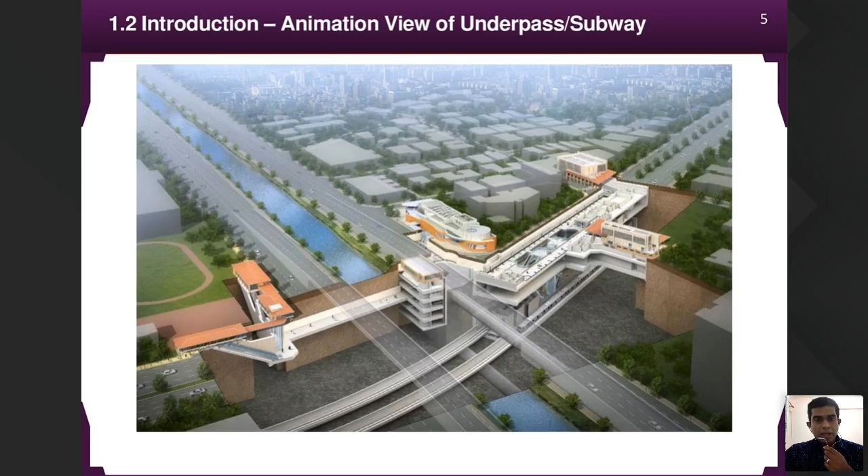So we will just see a scenario. In this picture, we can see two highways. Here is a highway and here is another highway. Also here we can see there is another highway cutting through this, and there is a water channel also there. So a government is constructing, just an example, a government is constructing an underground metro train.

So we can see this is one track and this is another track. After people coming out from the train station, they will go to this level called concourse level. Once they enter into the concourse level, if they want to cross to this side of the road, they need to come out and then cross this traffic light and then go over this bridge and then cross over this traffic light across the road.

So this will create a lot of congestion to the traffic because it needs to keep on going red and green, so there will be a lot of traffic jam if this is really a busy, very busy highway.

So for that, usually what we will do is we will build a subway. We can see this is a subway. Just now we discussed this one is a railway track one way, this is another way, and this is a subway. This subway is below the channel, the water canal, below this. So people need to cross over here, then come out, and then go to this side of the road. So this is just a typical example.

Now we go to the real side situation. Just an example, just now we saw in the previous slide, this is a one-way train track and this is another way train track. When people come out from this station, they need to go over here underground and then cross over here.

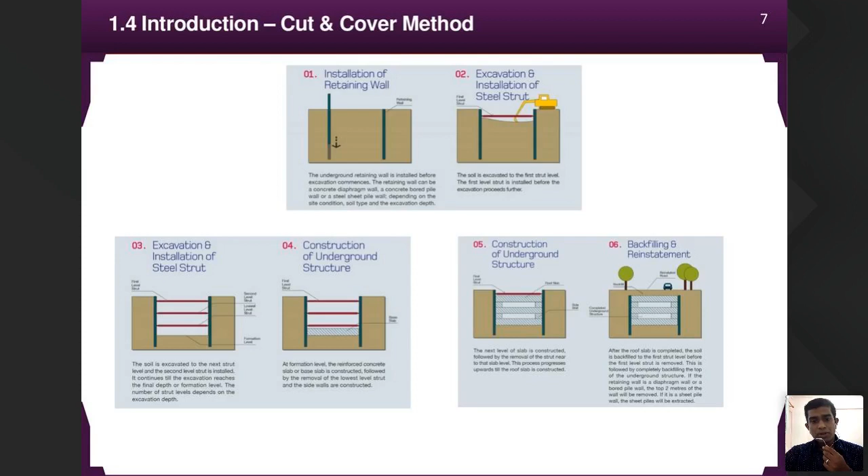So to avoid all this, we will be using this method. So for diaphragm wall construction, we will use the D-wall machines, and then after that we will pour the concrete. Then this is the starting. So this is actually a traditional way of constructing a subway or underpass.

Now we will come back to what are the utilities. So these are the utilities, and we need to divert them before we start building our retaining wall structure. Then there's the natural calamity impact.

During the construction time, there will be flooding, in case of Chennai there will be flooding, and in other places too. Then working in the hot sun and getting hit by vehicles, there will be vehicle accidents. There will be a lot of insurance issues if anything happens, and ground settlement, impact on groundwater level, and installation of recharge wells.

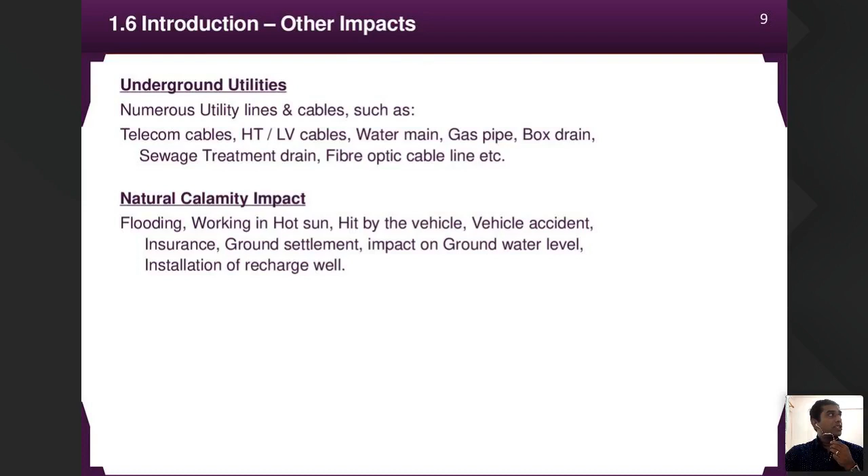So now we go to the tunnel boring machine. Just now we saw about the cut and cover method. So how will the tunnel boring machine help in this? Let's see a similar scenario.

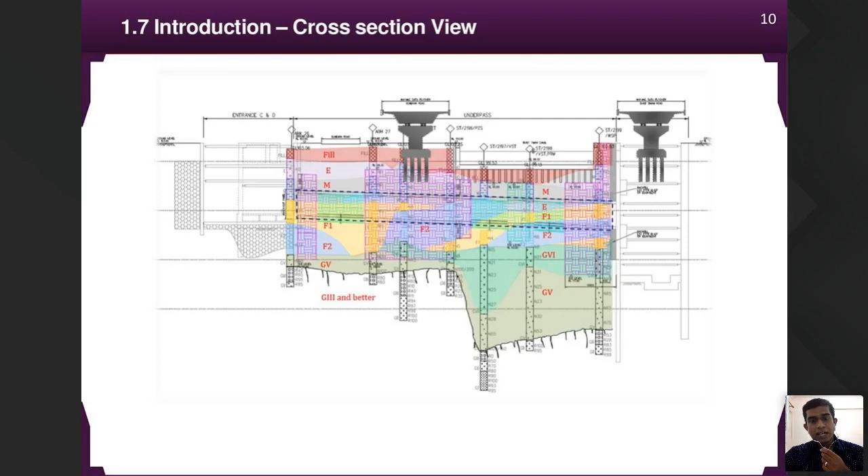So this is why we can propose the rectangular tunnel boring machine in place of the cut and cover method. So we will see the introduction and benefits of RTBM. Why do we use the rectangular tunnel boring machine, and what is the benefit? Compared to the conventional cut and cover method used in construction projects, the trenchless method with the RTBM brings about an estimated 40% increase in productivity, reduction in manpower, seamless and better continuity of work, and higher quality and workmanship.

We just now have seen the animation and also a real site condition. This we have done in Singapore. This particular area, the government planned to construct a subway, which we have already finished. They planned to construct a subway, but they needed to overcome all these difficulties: road, viaduct, overbridge, and a river.

So the government of Singapore contacted the government of China, and they came out with a proposal of using this RTBM. Usually the cut and cover method for this particular area takes an estimated 2 to 3 years, but we completed the same subway in the same location in 1 year, because 3 months is the construction using RTBM, but the preparation takes around 6 months. So 6 months plus 3 months for RTBM operation, then handover and reinstatement back to working condition, it all takes around 1 year. So when we compare to 2 to 3 years, we completed it in 1 year.

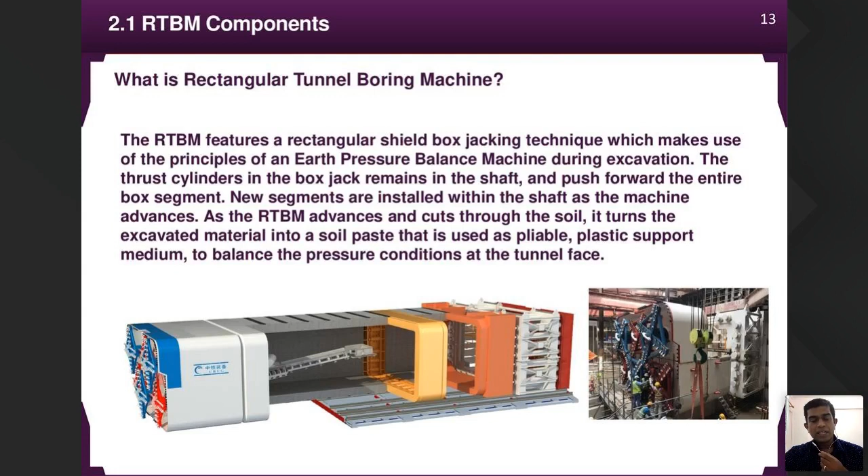So these are the main components of RTBM: the main body, thrust ring, main thrust system, back support, and here the man-lock double screw conveyor. RTBM is a very simple tunnel boring machine, not as complex as a circular tunnel boring machine.

The total length of a circular tunnel boring machine will be around 130 to 150 meters, with a backup support gantry required. But over here, it's not even 30 to 40 meters for the total machine structure. So RTBM main body, double screw conveyor here, man lock, main thrust cylinder, thrust ring, back support, and intermediate jacking system. We will discuss each one by one in the coming slides.

So the main machine, this is the main body. What are the components in the main machine? The first one is the shield, which holds the whole main machine. Then the cutter head - the blue and red are the cutter heads, which grind through the earth and take out the soil. Main drives are the motors which connect to the cutter head.

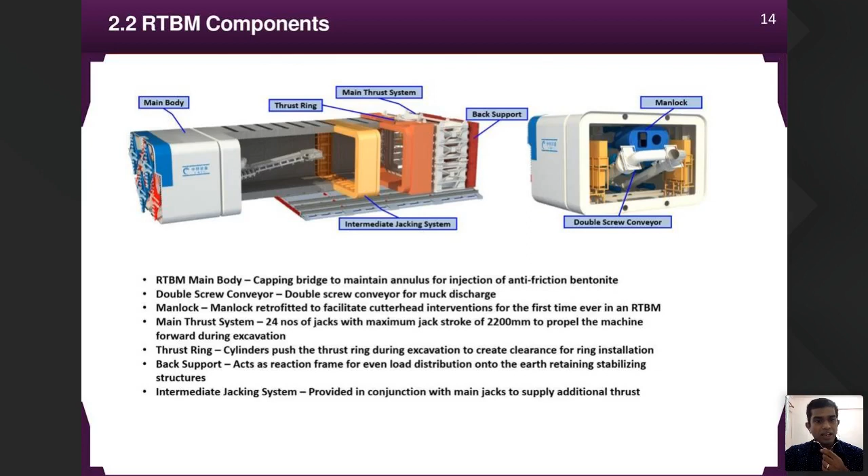The TBM keeps advancing, then we place a segment one by one. Once the thrust cylinder pushes out, we place the next segment, then push again, then put the next segment.

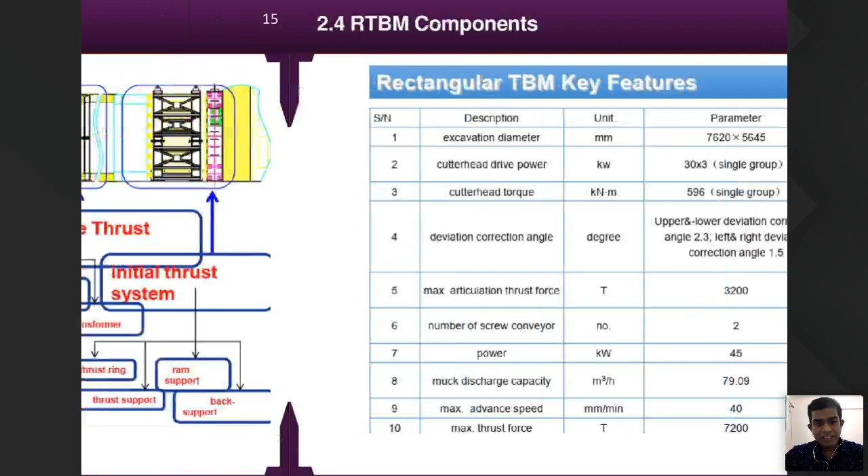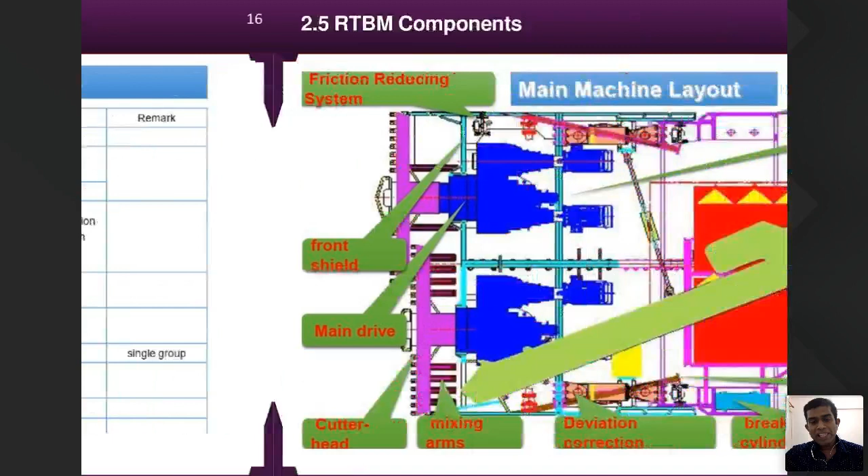And this is a mixing arm, behind. It won't allow the soil lump to accumulate behind, that's why it keeps mixing.

And this is the deviation correction cylinder. So in case the TBM goes out of alignment during the mining process, this deviation correction will realign the TBM back to the original axis.

And this is the breakthrough cylinder. When we mine through the whole segment and want to come out, we use this cylinder to push the TBM out of the tunnel, through the breakthrough cylinder.

So we have advanced grouting, electrical cabinet and screw conveyor, a firefighting system, and middle shield and tail shield. Next slide we will see more in detail.

So we finished the main machine layout. Now we are discussing the backup system. In this backup system, we have a foam pumping station. Later we discuss why we need foam for this system for this RTBM, and the air compressor.

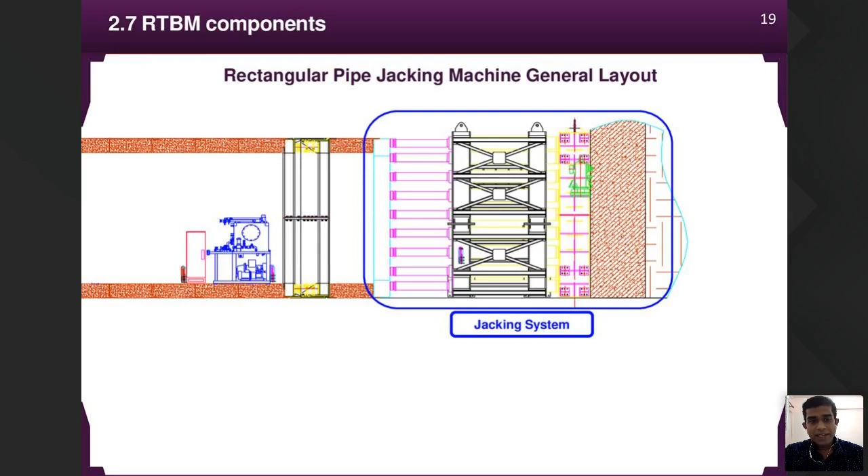And the rotational speed of this cutter head is not so high, so the ground above will not be disturbed so much. Low mixing torque causes minor disturbance to the ground, and this facilitates control of ground settlement and TBM position. This is a very simple structure and highly reliable in subsequent TBM operation.

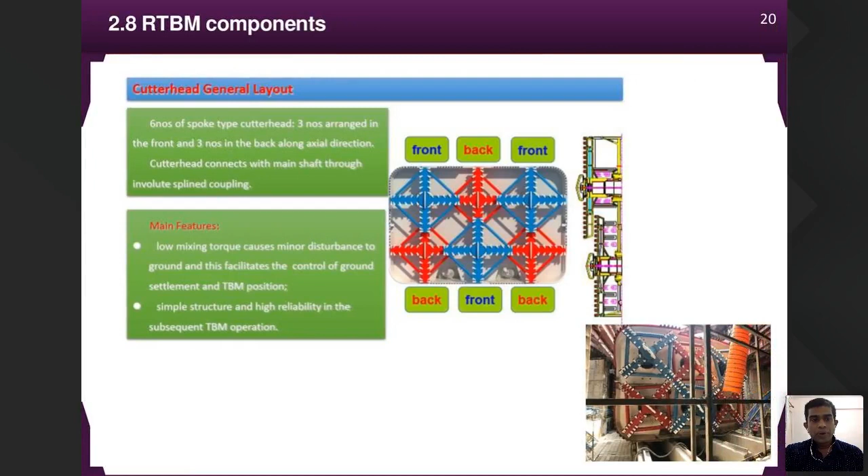So this is an overview of a cutter head. There are total 6 cutter heads. And this is a brief description about the cutter head and its drag bit.

Now we see how the cutter head opening ensures the flowability of the muck. Small contact area between the cutter head and cutting face facilitates the prevention of clogging. So we can see from the previous slide, the cutter head and drag bits are designed in such a way that it does not have much contact with the soil, so there won't be any clogging.

This picture is an actual drag bit taken on site. It has been designed in such a way that you can see the maximum area the shield is able to mine.

Hard facing for wear resistance purpose - all the surfaces of the drag bits are provided with wear resistance coating with high hardness. An evenly distributed additive injection port - just now we saw this is a foam injection port.

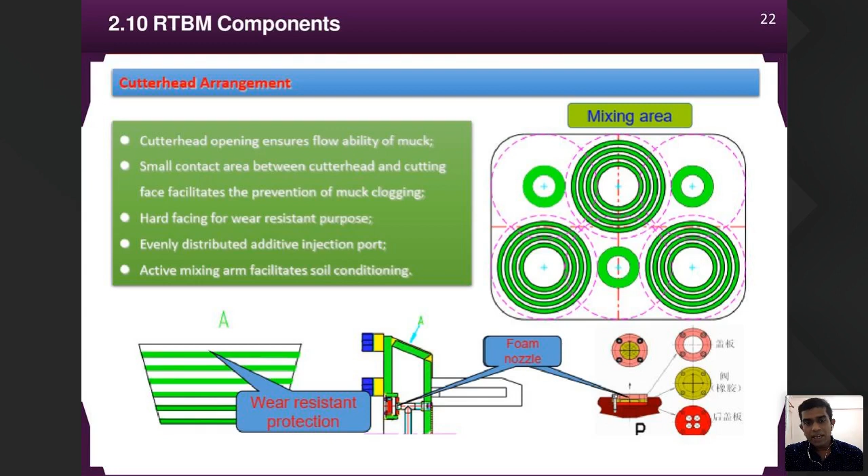Just now we saw this drag bit is made up of tungsten carbide material. So when the TBM advances, automatically the soil will be mined. We also have a drilling port where we can use high pressure water in case any portion of the soil has not been mined, with a high pressure water port and drag bit in front of the shield kerf.

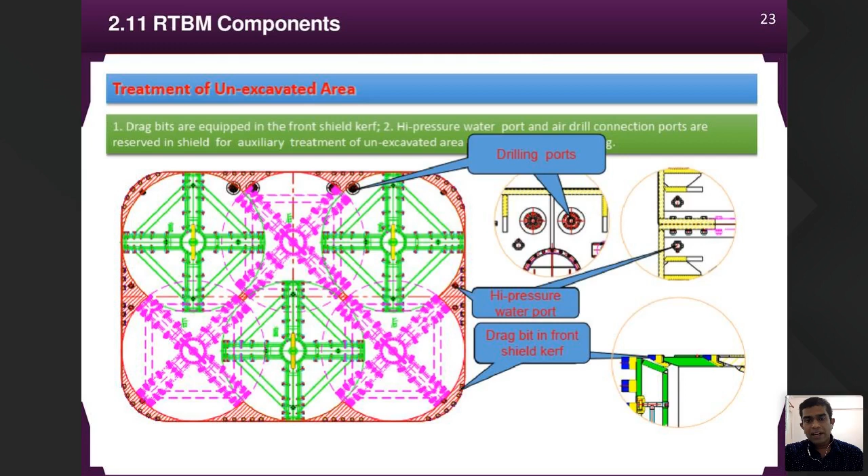So the whole periphery of the TBM is provided with drag bits, equipped in the front shield kerf. High pressure water port and air drill connection ports are reserved in the shield for auxiliary treatment of unexcavated areas.

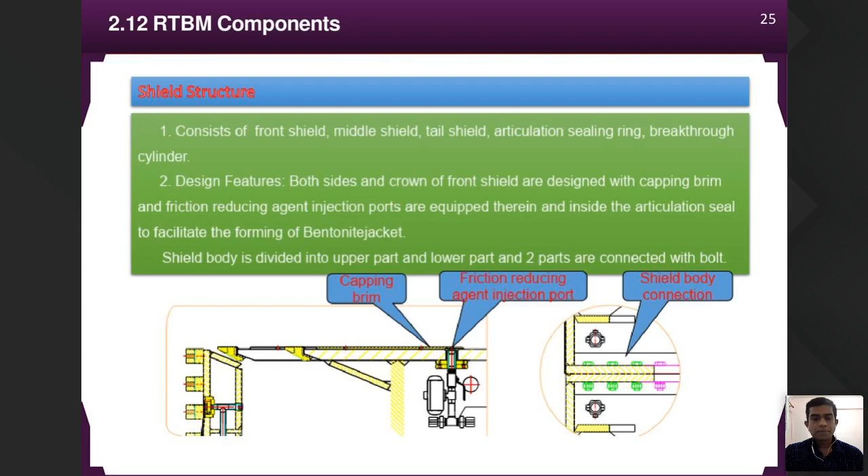The breakthrough cylinders are placed at the back of the RTBM, so that when we reach the final destination, we can use the cylinder to push out the RTBM from the drilling location. So we have the operational platform and also the breakthrough cylinders.

Now, articulation cylinder and parameters. These articulation cylinders are placed at the tail shield. Let me discuss - there are a total of 16 numbers of articulation cylinders. What is meant by articulation cylinder? Articulation cylinders help the RTBM in case we are mining through a place and the TBM suddenly goes out of alignment, not following the planned path.

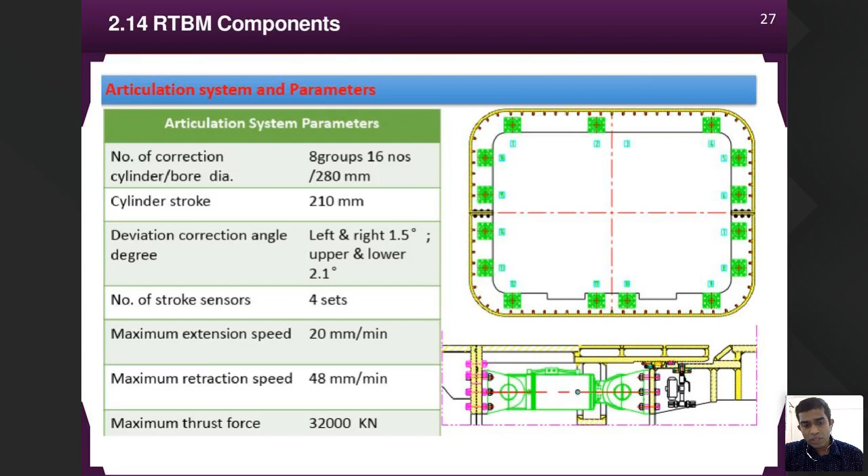Regarding deviation correction angle - what is the maximum deviation we can do? Since we have 24-hour operation with an operator continuously monitoring this movement, he can monitor whether the axis is following the right path or moving out. He can immediately do the correction using the articulation cylinder: left and right 1.5 degree, upper and lower 2.1 degree, number of stroke sensors 4. These are the parameters, and the thrust force it can give is 32,000 kilonewton.

Now, articulation seal. As we discussed, the main shield and middle shield are connected together, but the tail shield is connected through a cylinder. Due to this movement, there is a chance that water from the surrounding can come inside the TBM. For that we have an M seal and lip seal, and an adjustment bolt - this will avoid water leakage from exterior coming into the tunnel.

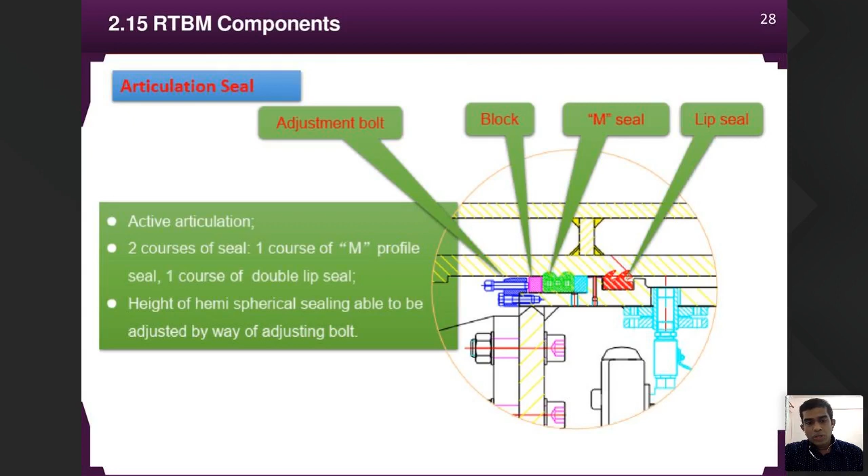For active articulation, there are two courses of seal: one course of M seal, called M seal because its shape is M, and one course of double lip seal. The height of the hemispherical seal can be adjusted by way of an adjusting bolt. When we tighten these two bolts, we can adjust the M seal - due to wear and tear from the movement of the TBM, there is a chance the seal may loosen. That's why when we tighten this bolt, it can be adjusted.

In rear it is provided with a double discharge gate. The purpose of the double discharge gate is, when mining through, we need to keep a face pressure, because if we never keep the face pressure in front, there is a chance there will be settlement on top. So we need to understand the soil condition in front of the TBM, and we need to maintain the face pressure, which will also be maintained by the screw conveyor.

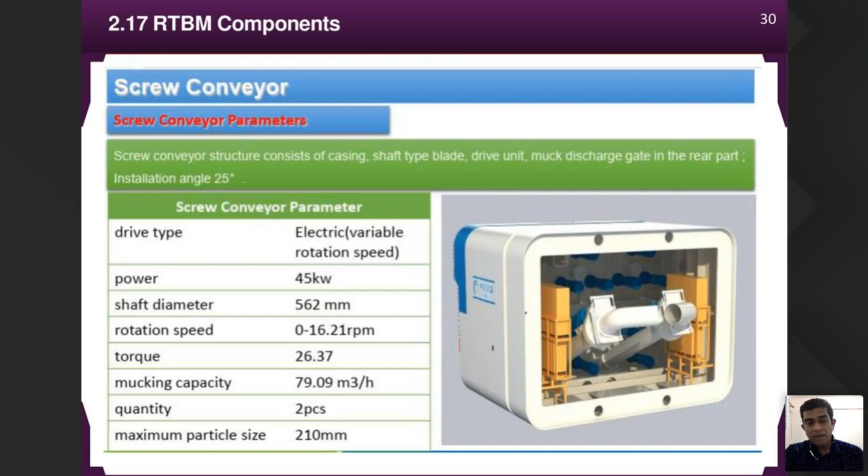So this is the injection system for soil conditioning. Just now we saw the cutter head is provided with foam injection ports, minimum of 5 numbers, equipped with a foam conditioning system, reserved with bentonite and polymer injection nozzles. 6 cutter head spokes are provided with soil conditioning nozzles, each spoke with 5 nozzles which can spray foam, and each pipeline has an independent pump to ensure proper soil conditioning.

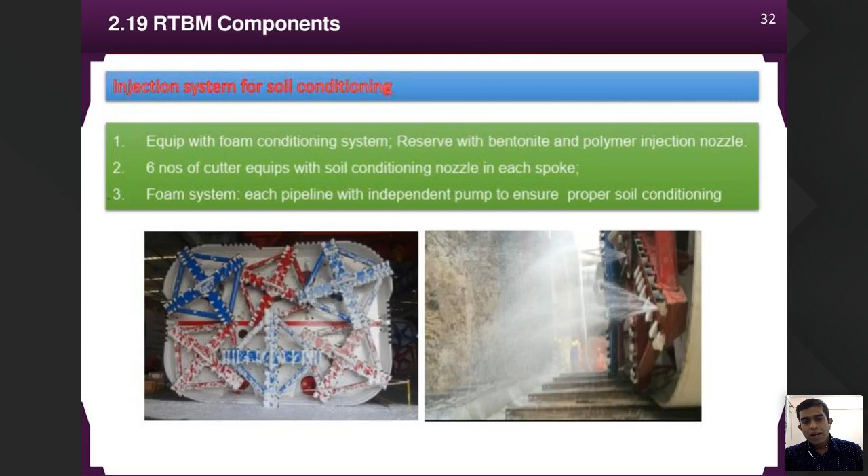We spray this foam when mining through a particular terrain and find that the soil is not able to be ground or mined easily by the TBM. So we need to use this foam system. The foam system is a type of chemical which will be mixed with water and air, and then sprayed into the soil, and the soil property will be immediately changed in a few minutes, which helps the cutter head mine easily. That is why we use the foam system.

So this is where the foam system goes - to the cutter head, and also to the screw conveyor. In case the soil inside the screw conveyor is difficult to take out, we will use the foam system to condition the soil before we take it out.

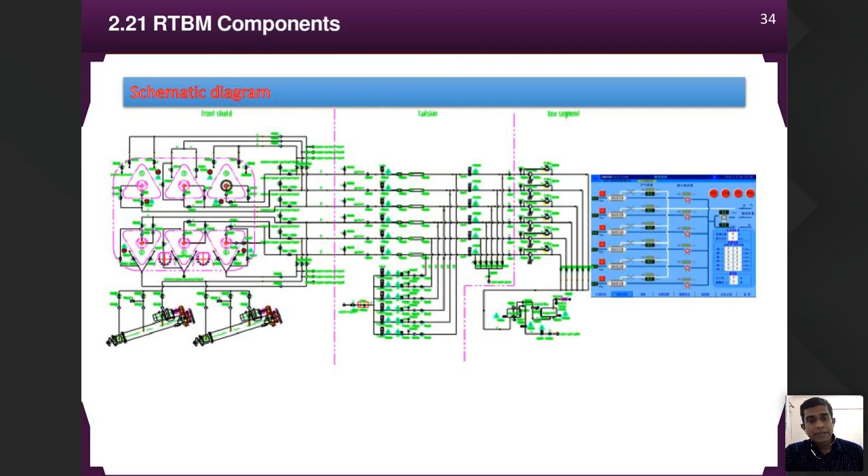So we have an air compressor system also. This is where the air supply will be - mostly for all the equipment or sensors. It provides air source for the foam system, bentonite system, pressure retaining system, pneumatic tools, air compressor, air tank, and filter components, integrated into an air pump station installed on the segment behind the main machine.

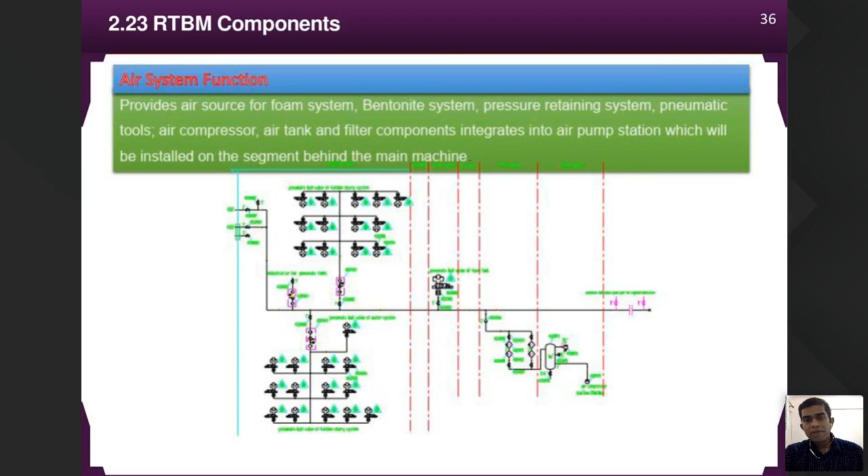So this air system and foam system will be in the backup system. Now the bentonite system - we use bentonite because when the TBM advances, there will be friction between the TBM shield and the ground. To avoid this friction, we use bentonite.

The equipment includes ground bentonite equipment, bentonite storing and pumping equipment, grouting pump, grouting injection hole, grouting pipe, bentonite injection device, and associated pipeline. So bentonite is used to reduce the friction between the TBM shield and the ground.

So this is a bentonite system. This particular system is a front shield. We have a bentonite system which comes with a non-return valve, a manual valve, and a pneumatic valve. It's provided with a replaceable plastic non-return valve to prevent soil intrusion and pipe clogging. When we open this, bentonite will be pumped out. This is just an example of a TBM shield - the bentonite will be pumped out and the friction between the soil and the TBM will be reduced.

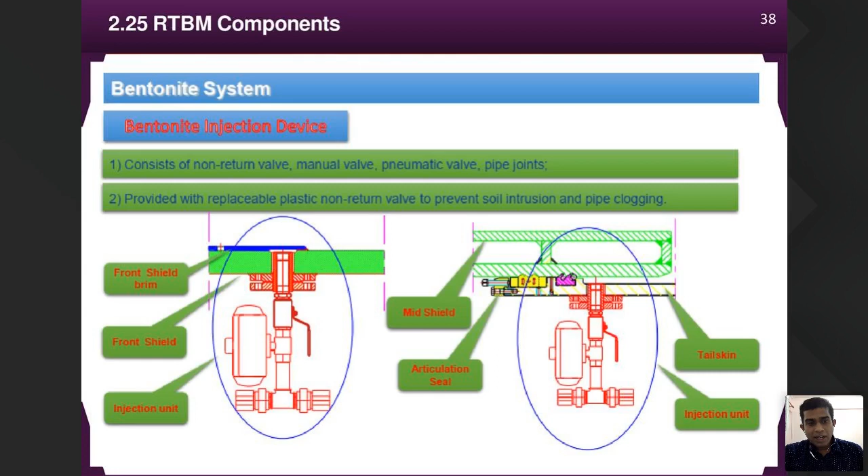The automatic circulation system enables highly efficient bentonite injection and precision. This is totally a PLC system. The TBM has sensors installed, and it is an automatic system based on pressure, so bentonite will be automatically injected to reduce friction between shield and soil, eliminate soil disturbance, reduce friction, and reduce thrust force.

So for the power system, we have a high tensile power system. A transformer mounted on the segment transforms 380 volts into 220 volts and 24 volts as required voltage rating. Our cutter head motors require different power, and other equipment like the foam system, air system, or bentonite pump require different power supply. So we have a separate transformer inside our RTBM at the backup system.

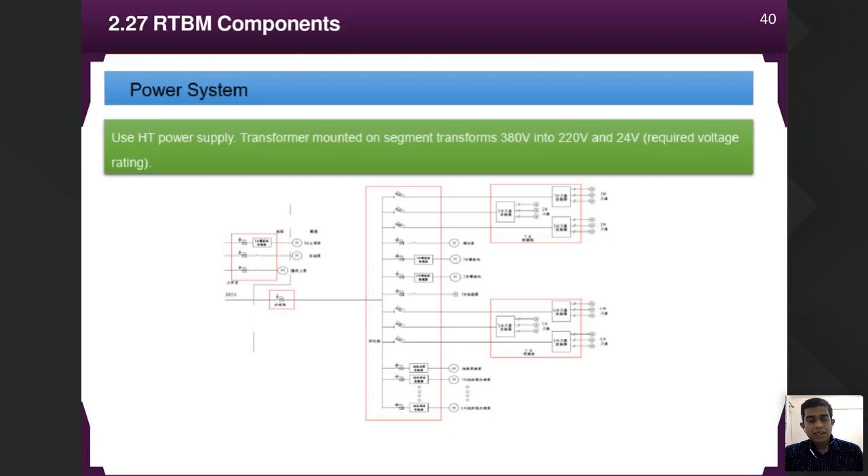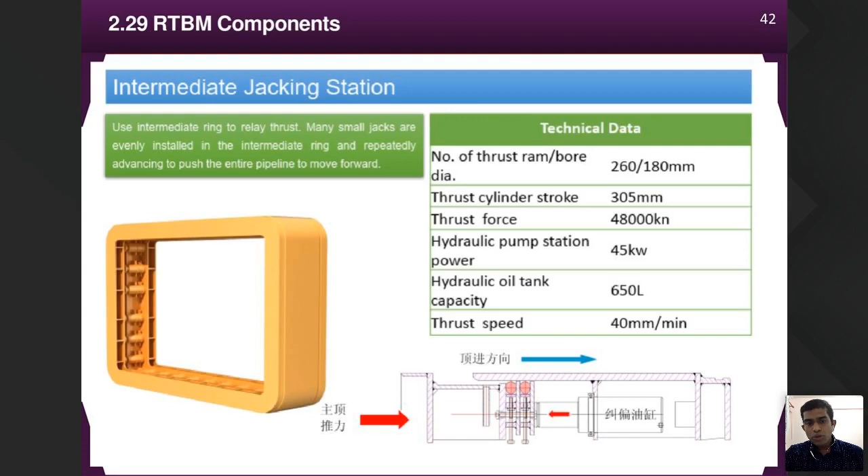So this also pushes. It has a total of 260 small diameter cylinders which can push the system, pushing the whole operation.

So the thrust cylinder is a major item of the TBM, another important part. The thrust system is composed of the main thrust cylinder. These are the thrust cylinders, and this is a stud on top - these are the studs. We have a hydraulic pump station mainly to provide power for the rectangular TBM and segment.

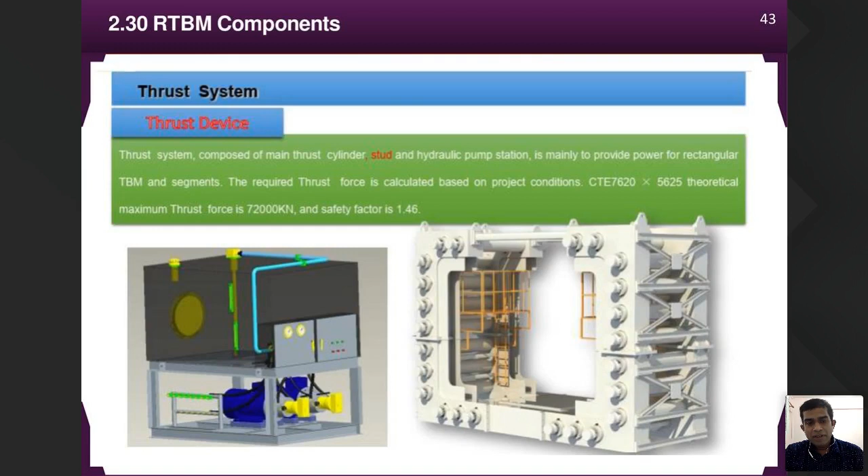So in front of this thrust cylinder is a segment - we'll discuss the segment later. In front is our RTBM. When this cylinder expands, it will push the segment, and the segment will push the RTBM forward. Parallelly, the cutter head will cut through and move forward. The required thrust force is calculated based on project conditions, and for a diameter of 7 meters to 5 meters, the theoretical maximum thrust force required is around 72000 kilonewtons, with a safety factor of 1.46.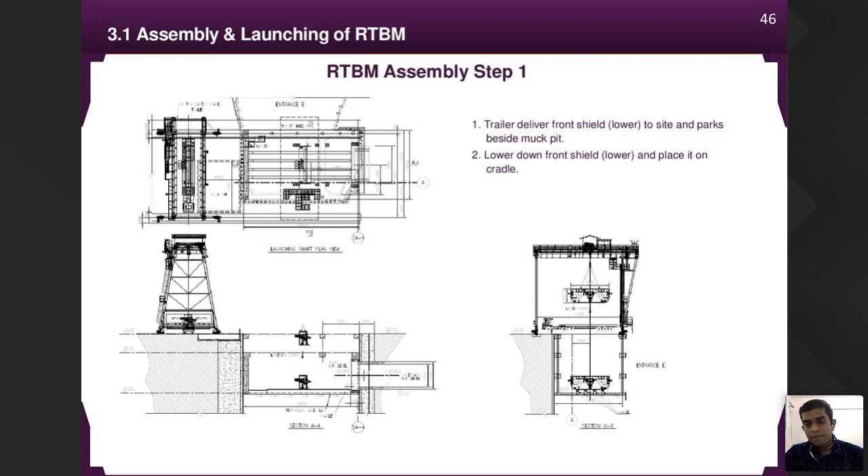So first we place the lower shield, then we bring down the two main drives, which are usually motors. We lower down the two main drives one by one and install them on the front shield lower part. This one already came out with the lower front shield in the previous slide. So here we install the two main drives.

Next we lower down the upper front shield, which is placed on top of the lower front shield. This is a cross section view. The upper and lower front shield are bolted together using an 8.8 grade normal bolt, around M40, to connect the lower front shield to the upper front shield.

So the main body, as we saw in the previous slide, is the shield, cutter head, main drive, screw conveyor, and man lock. These are the main parts of the TBM, which we call the main component. In the previous slide we saw three sections: the front shield, middle shield, and tail shield.

Now we are talking about the front shield. We lower down the front shield lower part and upper part, so that part is already completed. Then once the front shield is finished, we lower down the middle shield. The middle shield is placed on the cradle, and then we lower down the man lock supported inside the mid shield.

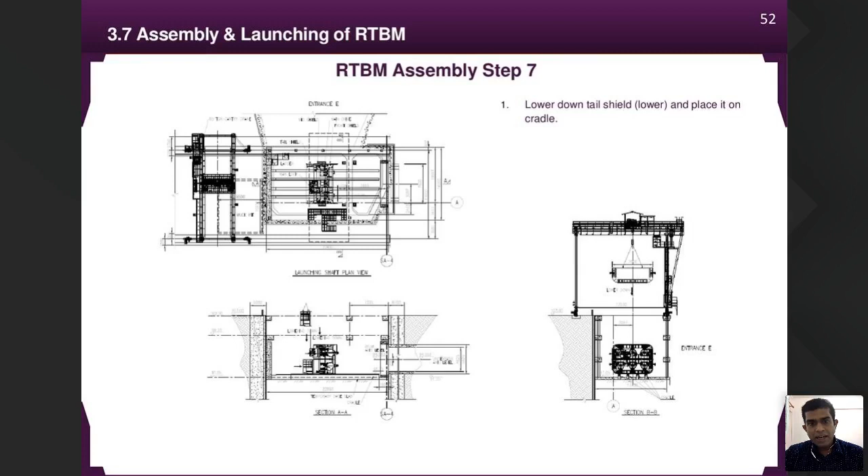After that, we lower down the mid shield upper part and connect it to the mid shield lower part, connecting the mid shield to the front shield. Then we lower down the tail shield, lowering the tail shield lower part and placing it on the cradle. Now the front shield is finished, the middle shield is lowered, the tail shield is lowered including its lower part. Now we lower down the two screw conveyors one by one and connect them to the front shield.

Why have they split the main body into three components? Because if we had a single main body, we'd have difficulty installing the motors that drive the cutter head, and difficulty installing the man lock. The man lock's material thickness can withstand around 4 to 8 bar of air pressure, and people need to maintain pressure up to 3 bar when working inside before they can go in front of the cutter head.

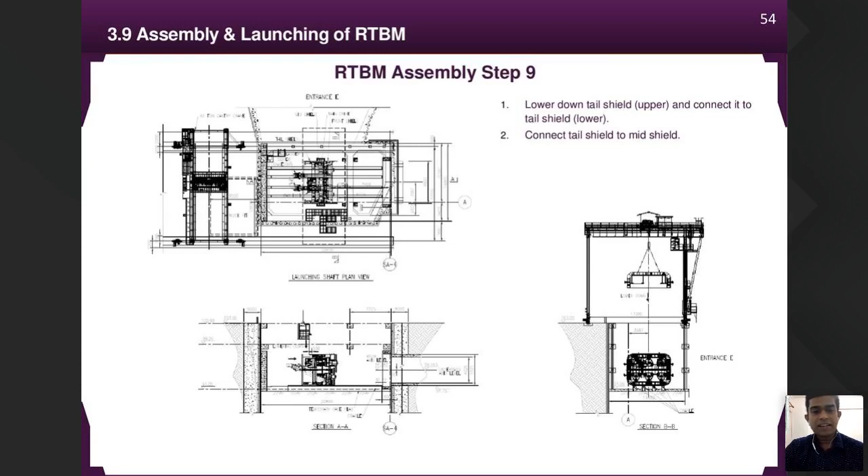And lower down the tail shield upper and connect it to the tail shield lower. Then we will lower down the tail shield upper part and connect the tail shield to the middle shield.

Once the three shields - front shield, middle shield, and tail shield - are connected, then we will lower down the 6 cutter heads one by one and install them on the bulkhead, moving the RTBM forward. Once the 3 shields are installed and tightened by bolt, we will bring down the cutter head.

We can see these are the cutter heads. We bring down all 6 cutter heads, then connect them with the main drive, and move the RTBM forward.

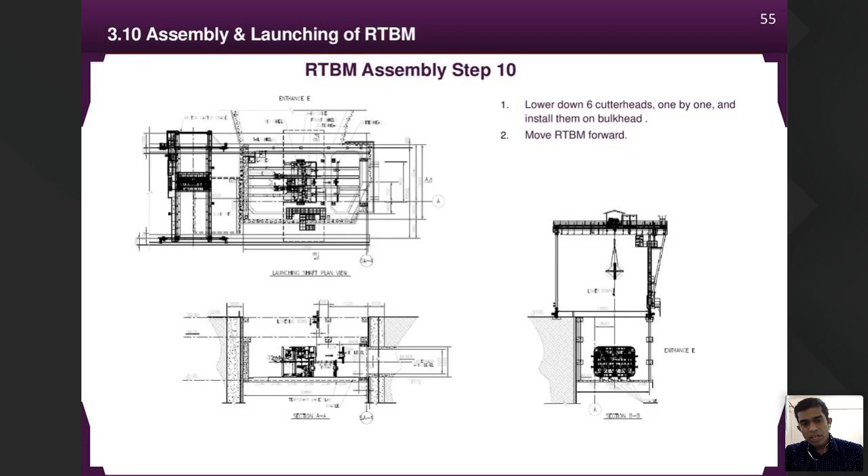Lower down the back support. Just now we saw the back supports are supported by the air system, foam system, and we have a transformer, so all will be in the backup system. Lower down the back support and place it in the back system.

Then after that, lower down the thrust system lower part and place it on the cradle. We will put the upper part, move the thrust system and connect it back to the back support. So first we will place the back support, and once it is placed, then we will put the thrust system.

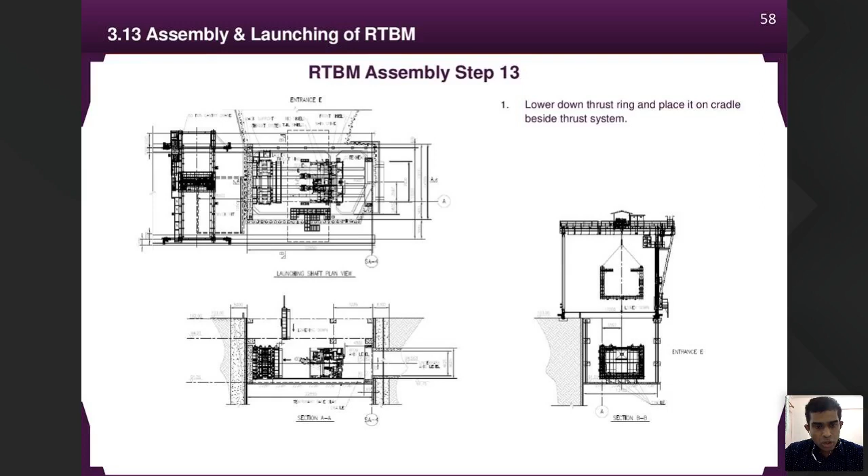Then lower down the thrust ring and place it on the cradle beside the thrust system. We can see this is a thrust ring, a movable part. The thrust system is here, and the thrust ring will be placed here. This thrust ring will push the TBM forward, and intermediately we will install the segment. Later we will see the segments.

Lower down the segment beside the thrust ring and place it on the cradle. So this is a segment. Usually the segment is in a rectangular shape, cast in a single cast, of grade 50 or depending on the soil condition. This will be decided by the overburden and other calculations based on soil condition.

Then we will install auxiliary equipment - all the auxiliary equipment, connecting all pipelines, hoses and cables. The RTBM undergoes site testing and is ready for launching.

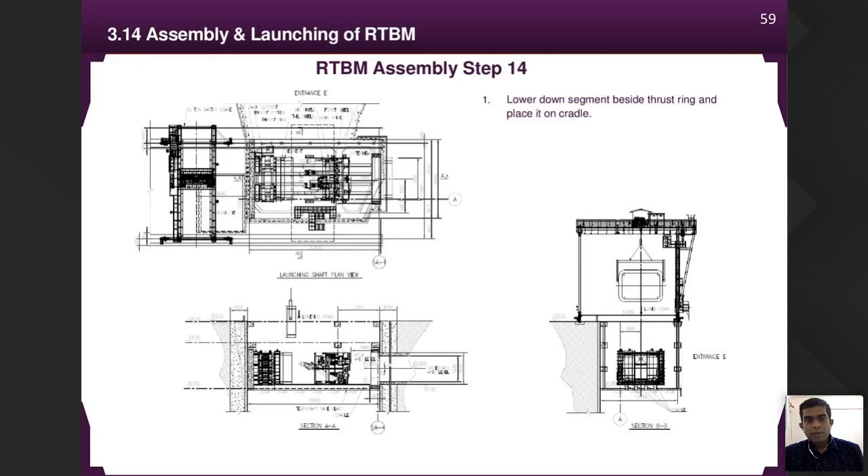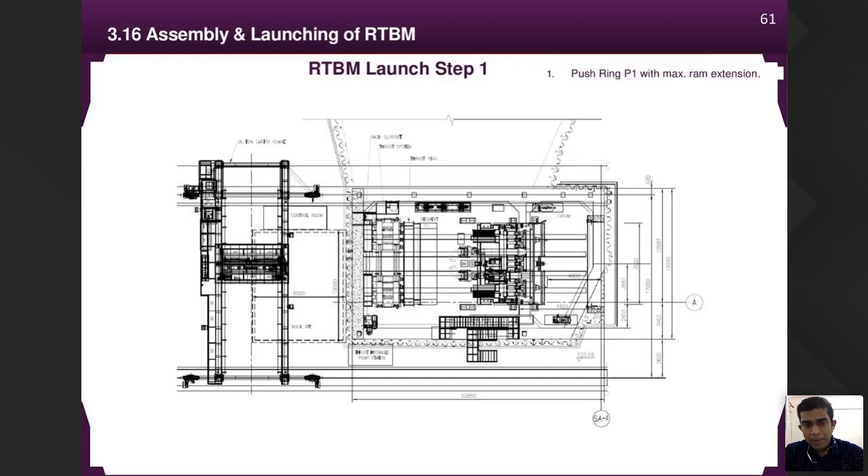So that is what we are doing here - this is a segment. Segment 1 will be placed, then this cylinder will expand and push the segment near to the main body. Then after that we place the next extract.

From this we can see the extend ram and thrust ring, and lower down ring number 2. The P ring is the next ring, and we push P2 and P1 with the maximum ram extension. Lower down ring P3 and push P3, P2 and P1 with maximum ram extension.

So once P1 is pushed in front, we will put P2, and then we will put P3, one by one, and then push forward. In this picture you can see we will put segments P1, P2, P3, P4, P5, P6, and then it keeps pushing, and the RTBM starts to move and touch the retaining wall structure.

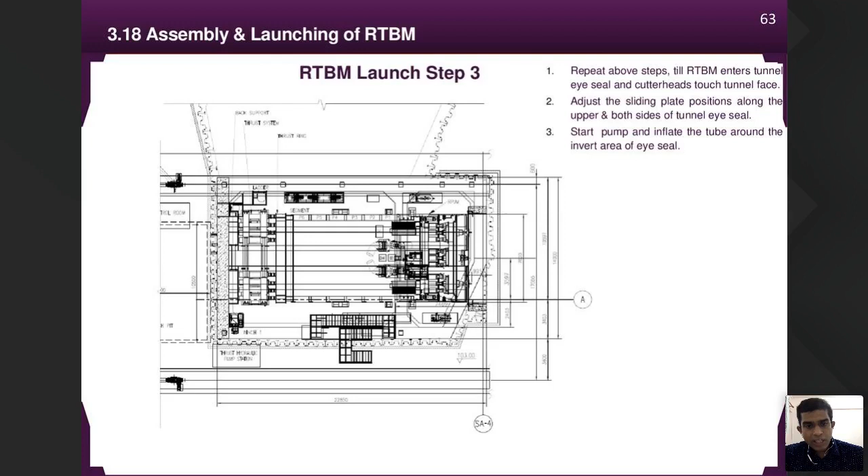And pressurize the cutter chamber. So once it touches the cutter chamber, the gap between the TBM shield, the front shield, and the retaining wall structure needs to be pressurized.

Lower down ring P6 and push RTBM to excavate, lubrication injection. Secure ring P2 to anti-backward frame with fixing pin. Lower down P7 and push P6, then release pin and RTBM continues excavation.

So after we place P1, this is an extended cylinder and this is a thrust ring. Once P1 is pushed, then we will have P2, P3, P4, P5, P6, all placed one behind the other. The P1 leads in front and it touched the TBM, and the TBM now has already touched the retaining wall structure.

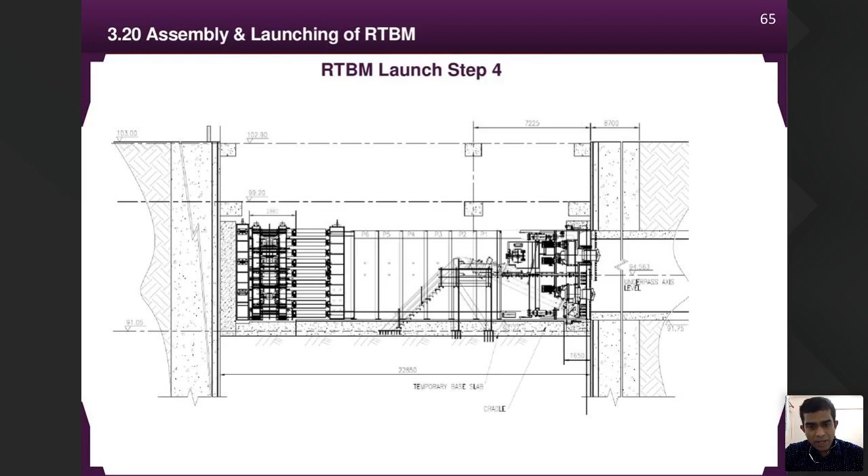So this is a cross-sectional view. This is the back support, thrust system and thrust cylinder. This is a thrust ring. So this is an extendable thrust ring, thrust cylinder, and these are the segments, and it is connected to the TBM, and the TBM is now following the subway path.

So we can see we keep on placing the segment behind. Later in the next slide we will see about the segment. Now we just consider there is a segment here. There is some concrete structure of 500 mm width placed over here like that. Then it will go inside.

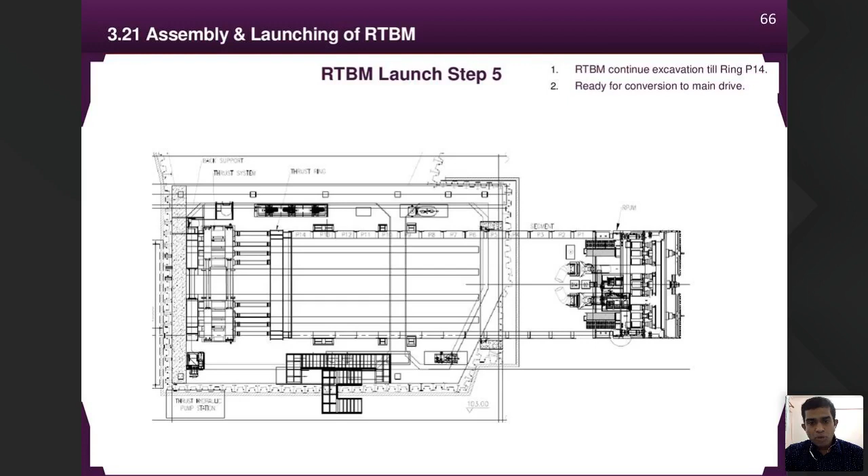Then this is how the RTBM tunnel arrangement works for the main drive. Previously we don't have enough space to put all other services like the air system, foam system, and bentonite system into the tunnel due to space constraints. When the TBM moves forward to a particular space, we have enough space. Then we call it the main drive. Then we bring in all the backup systems inside the tunnel. Then the TBM will be a complete system which can move forward.

Install the conveyor belt system behind the RTBM. So we need to install the conveyor belt system. Shift other parts of the system to the tunnel, so the air compressor and everything will be shifted inside. Install ventilation and cooling inside the tunnel. As the tunnel is below the soil, heat generated will cause a temperature rise, so we need to have a ventilation and cooling system.

An RTBM ready for main drive. So once the RTBM moves around 14 rings, then we can bring down all other backup systems inside.

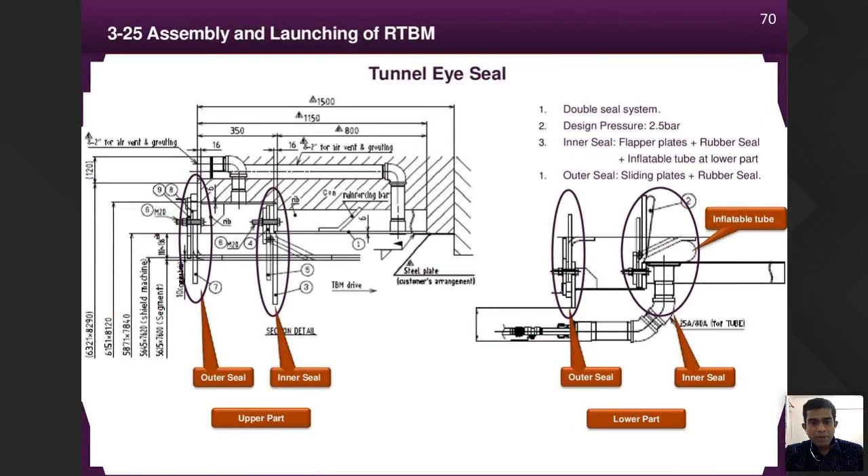So, design and general arrangement, casting item, fabrication of segment. So this is a segment. Just now we saw in the previous two slides that we will be placing the segment. These are the segments between the RTBM and the thrust system. We will be placing the segment, then after that the thrust system will push the segment. Now we are discussing about the segment.

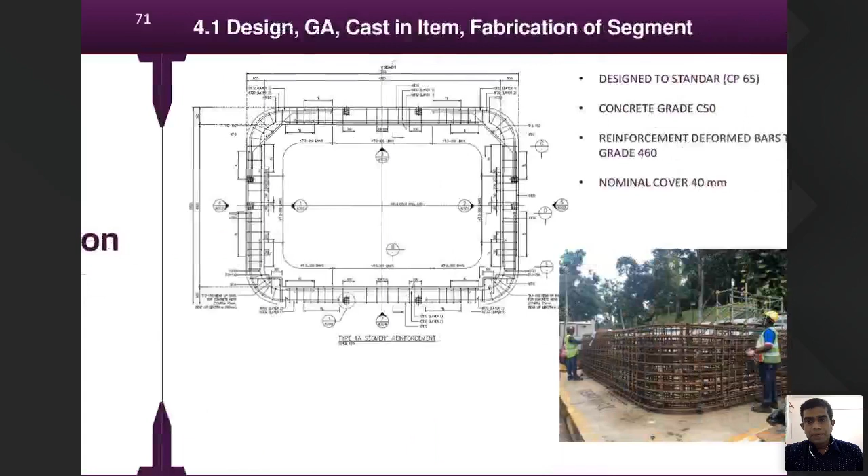Over here we can see this is a segment, and this is a rebar arrangement. This is designed to the standard of CP65 for our project. The concrete grade we have used is grade 50, with reinforcement deform bar T grade 460 for the rebar, and a nominal cover of 40 mm. So this is the standard for our segment.

Once this segment mold is ready, this particular segment will be made in a single cast. Once we make the single cast, the rebar is inside. After that, we will cover this rebar with the mold, or this rebar will be shifted to the permanent mold.

Then we will pour the concrete. In our project, we need to speed up the project to show productivity, so we have ordered concrete which can achieve a strength of 30 MPa in 24 hours. The supplier is able to supply this and we pay for it. So in 24 hours, the concrete needs to achieve 30 MPa strength, because only after 30 MPa can it hold its own weight.

You can see we have already lifted this segment, and this is a steel ring - we will discuss the steel ring later. Once the segment is fabricated, we will stack it before launching. All segment fabrication needs to be done as soon as we mobilize to the site.

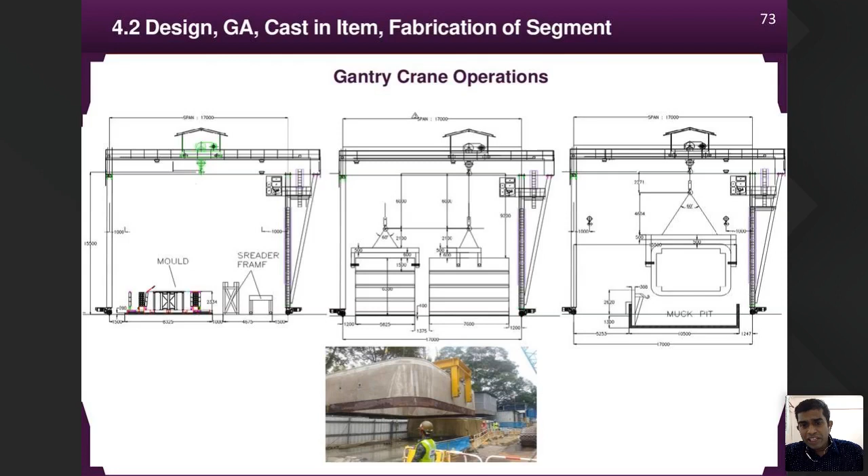So after the mold is prepared and the concrete is poured, you can see this spreader bar here. What is the spreader bar? It is used to carry the segment and also to turn the segment from horizontal position to vertical position - we need to turn it before we can lower it down. Then you can see from this picture, this is a single segment.

So here, this is the single segment we are using. Then it will be lowered down, and in the next step we can see the TBM advancing forward.

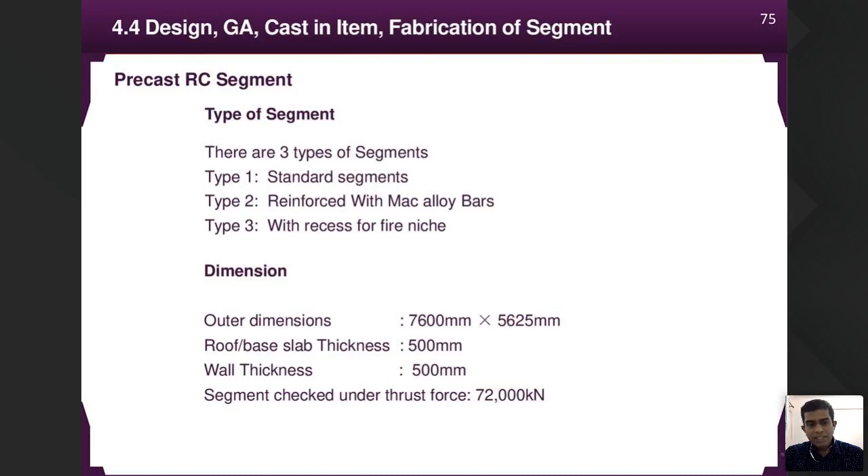What are the accessories other than the concrete segment? What other things do we require? We need a lifting socket, a total of 6 plus 2, 8 sockets required. All these 8 sockets are for lifting and also turning the segment.

The lubrication socket is used to supply bentonite surrounding the segment, so there is no friction between the moving segment and the soil. The exchange grout socket is used because once the TBM is in its final position, we will inject grout at the periphery of the segment to clear the void between the segment and the soil. This is because the TBM front shield has a 25 mm excess recess, which is there to allow free movement of the segment. This recess exists along the whole length of the tunnel between the segment and the soil, so we use grout to inject and fill it.

So we can see this is a segment, and these are the lifting sockets. After we lift from both sides, we will turn it. This is our mold, the yellow color is the mold. So we are lifting the concrete segment after 24 hours.

Segment geometry, and just as there is a correction, actually we will take out the segment after 20 MPa, not 30 MPa.

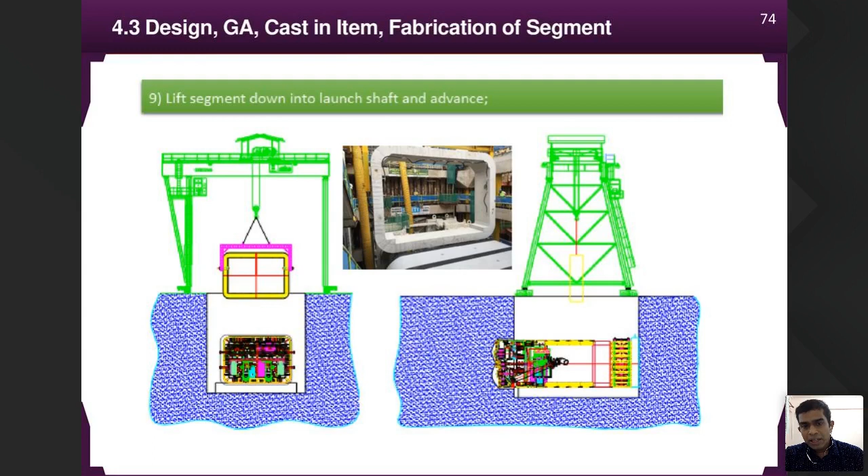Segment geometry and waterproofing system. So just now in this picture, we have seen many segments. Here you can see one segment placed next to another. So what is a waterproofing system? How do we ensure that there is no water path created?

So here we can see this red color line is one segment, attached with a steel plate. This steel plate is welded to the rebar, and this rebar is inside the concrete, so that this rebar, not just one rebar, goes around the full circumference. This is a steel ring for the full circumference of the segment, used for the waterproofing of the segment and waterproofing of the tunnel. So this steel ring and then the segment, I think you can imagine this one.

This is a concrete structure, and this is a steel ring. Between the concrete structure and the steel ring, there will be two waterproofing gaskets. One is a double wedge gasket like this, and another is a compressed gasket. Both these gaskets are from Korea.

And also we have a load distribution pad, because this green line is another segment, this red line is another segment. When these two segments contact each other, it should not have a sharp point. That's why we are using a load distribution pad, and also an open cell polyethylene foam backing rod.

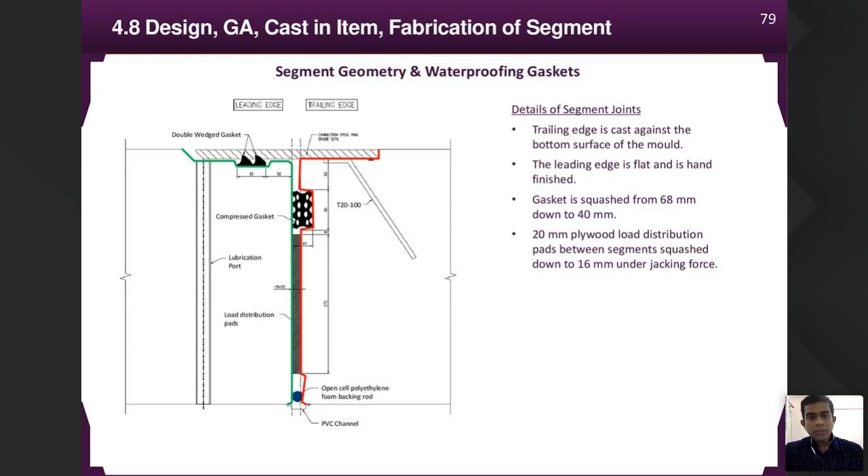We will insert this foam backing rod so that in case there is a water path through this soil area, if water comes through and the waterproofing system fails, and the secondary waterproofing system also fails, then we have a third system, not waterproofing but a channeling system. If we have no choice, the water will go through this open cell polyethylene backing rod. If this also fails, then it will go to the PVC channel. Here it's mentioned as PVC channel, but we changed to an aluminum channel, so the aluminum channel will bring the water down to the bottom of the segment.

Just now we saw this waterproofing system, because one side of the segment has no steel ring, and the other side has a steel ring. So wherever there is no steel ring, the next segment's steel ring will come and contact it, and that is where this waterproofing system will be applied. So this side has no waterproofing system, only the no-steel-ring side.

We will install both gaskets, and then we need to do water curing. Then after that we will store the segment.

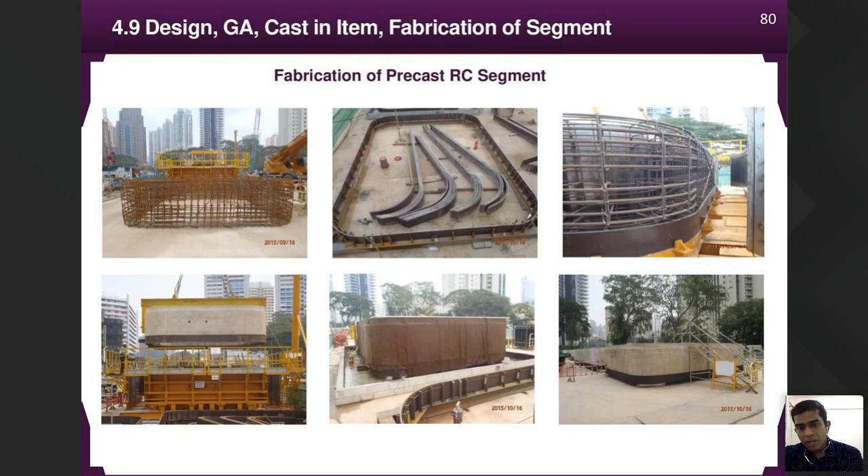So this is a completed segment. As we saw in the previous slide, this segment will be placed between the main drive and the thrust system.

And this is a segment, and you can see all these ports are connected by bentonite ports. These are bentonite ports where, when the segment moves, bentonite will be injected so there will not be any friction between the segment and the surrounding soil.

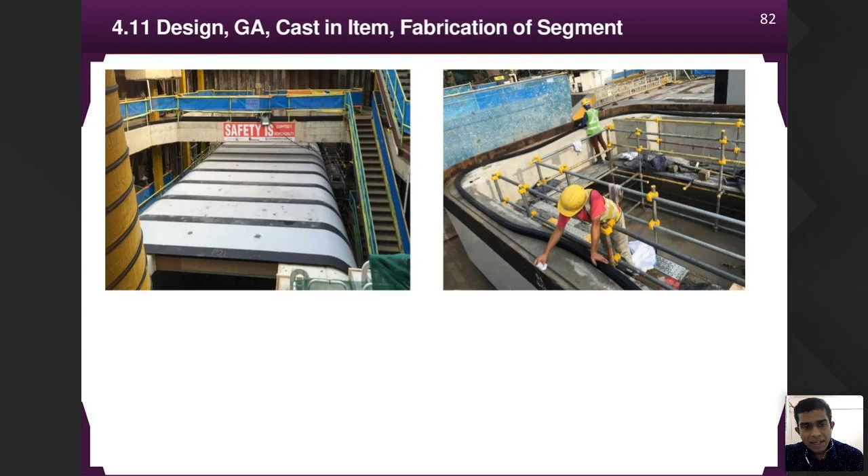So here, this is a thrust cylinder. This cylinder will expand. This is a thrust ring, which will push this segment and all the segments inside. This acts as a ram, operated by a hydraulic system. This will move forward, the whole structure will move forward, and this will push. This is a leading edge, and in front is the TBM.

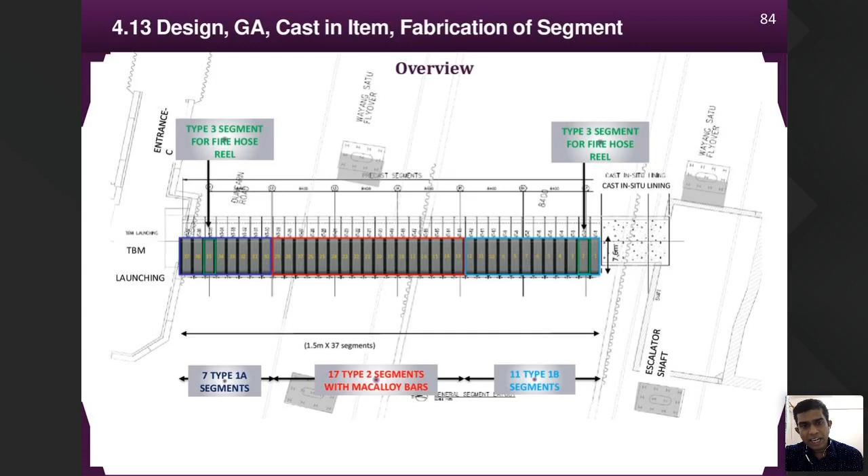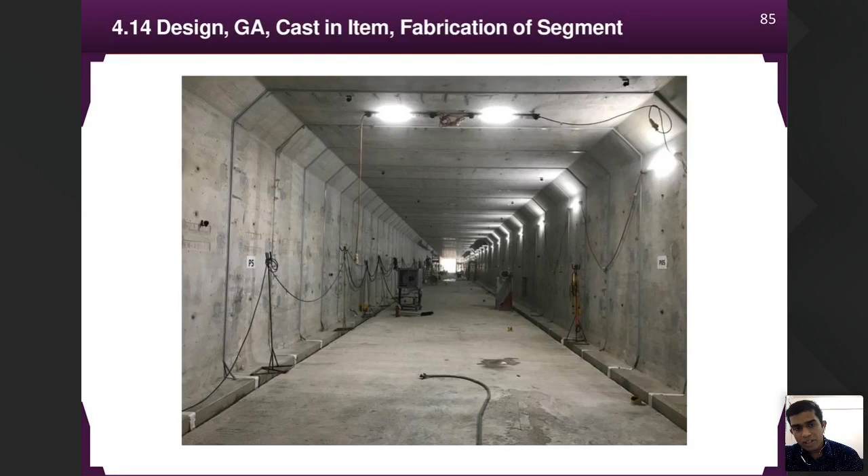So we will see the RTBM video. First, we will see the animation part of the video. You will understand the whole operation, whatever we discussed now. Maybe there is too much information, but I think from this video, if you have understood the previous explanation, you can easily correlate. So I will play the video now - it is a more informative video. Please watch.

Vimal sir, I think the video is not playing properly. Okay sir, can I replay again, sir? Yeah, it's stuck, it's stuck. Oh okay sir, I'll replay the video again from the start. Yeah, okay please sir, try sir. Can you see, sir? It's working, sir - no, okay sir. Sir, the video got stuck up again. Oh okay sir, can you see the video, sir? Can you able to play? Maybe I'll try, I'm not sure. Okay sir.